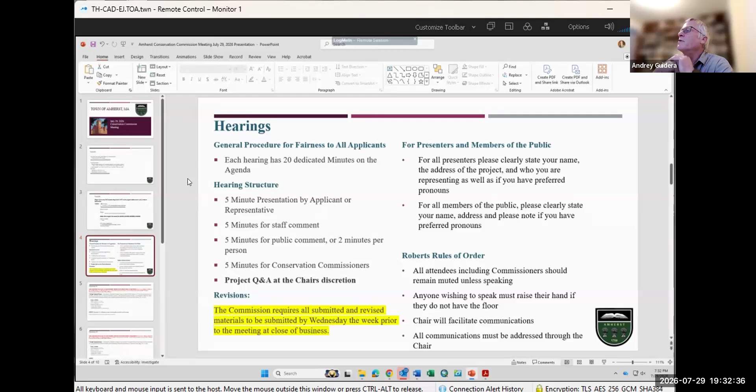This public hearing is now called to order. This hearing is being held as required by the provisions of Chapter 131, Section 40 of the General Laws of the Commonwealth, an act relative to the protection of wetlands, as most recently amended, and Article 3.31, Wetlands Protection under the Town of Amherst General Bylaws.

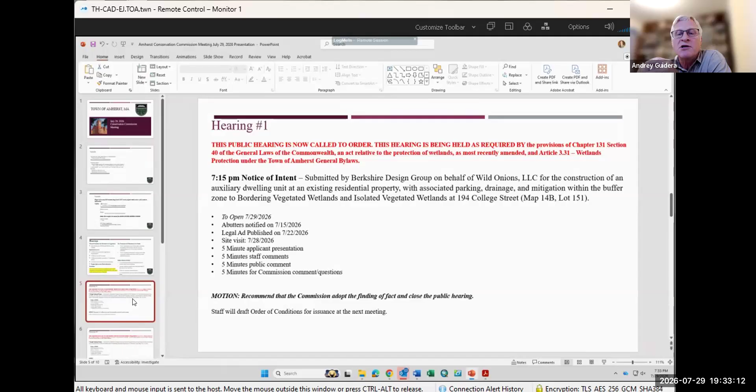This is a notice of intent submitted by Berkshire Design Group on behalf of Wild Onions LLC for the construction of an auxiliary dwelling unit at an existing residential property, with associated parking, drainage, and mitigation within the buffer zone to bordering vegetated wetlands and isolated vegetated wetlands at 194 College Street, map 14B, lot 151.

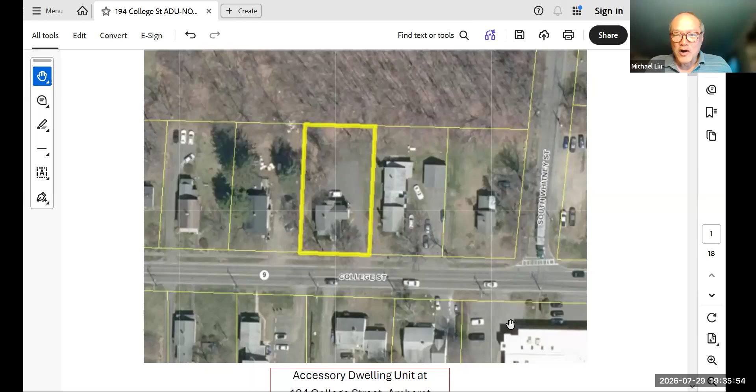This property, 194 College Street, is highlighted in yellow, that lot. The existing house you can see, and then there's a driveway that goes around on the east side, going north into a parking area. This survey shows the wetlands identified and delineated by Ward Smith of Wenda Wetland Services. In blue here, this is off-site. Along the north side there's an existing swale on the west side that's actually off the property, but there's an isolated wetland at the bottom of that swale shown in this blue line. The red lines indicate the 50-foot no-disturb zone, the 75-foot building setback, and this is the 100-foot buffer zone. So you can see that about 88% of the parcel is within buffer zone, and there's already development within 50 feet of the wetlands. The house is within the 75-foot building setback already, and there's further development out to the 100-foot buffer zone.

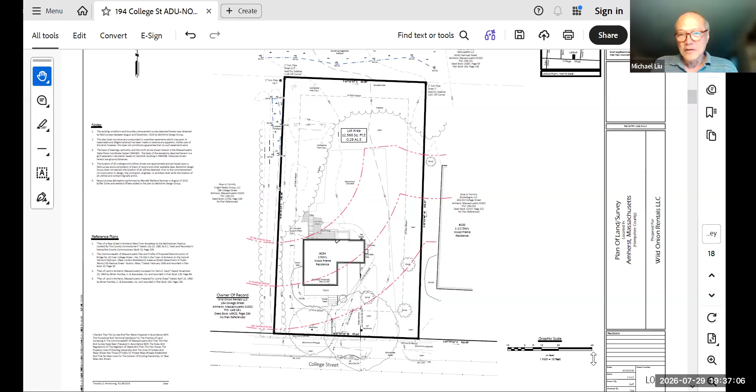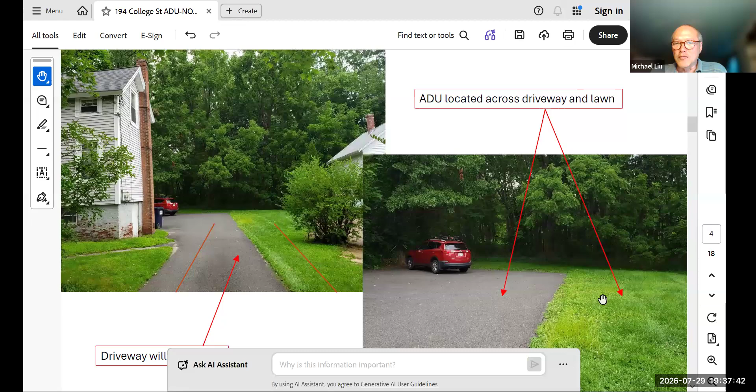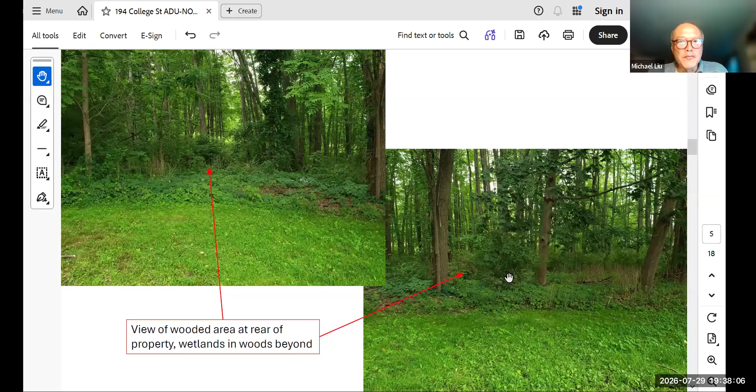I'm just going to go through some pictures real quick. This is a picture from the street with the driveway on the side. The ADU location is proposed to be where the arrow is pointing, in the back. In this photo from the driveway, the red lines indicate that the driveway is shifting over, and then it would go into the ADU, situated back here. The ADU would straddle where the existing pavement is and part of the lawn. In the back, in the woods, you can't see the wetland flags—our surveyors restaked them after I took these photos, but the wetland line to the north is within the woods. It's actually up gradient of the site by about a foot, so there's little chance of runoff migrating in that direction.

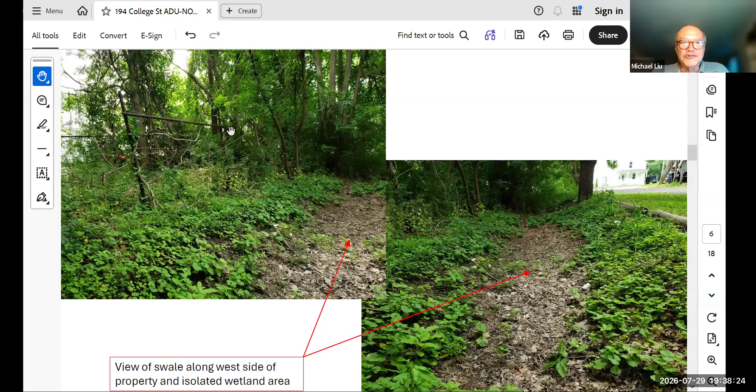These are photos in the swale and the isolated wetland area—I'm standing in the swale, looking back toward College Street. To the left here there's an old existing steel clothesline. There are actually two of these in the back of the site, which we're proposing to remove as part of the mitigation, and we'll talk about that. Ward can give a quick presentation on that mitigation after I finish.

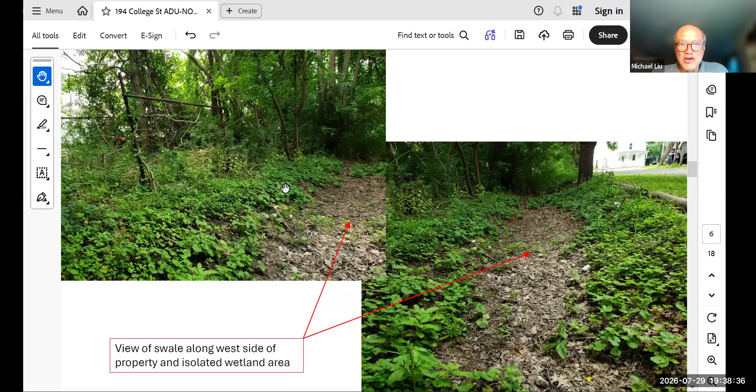In the back here, in this photo, I want to point out that in the rear of the existing building there are currently these bump outs. There's a first floor bump out off the kitchen, and a second floor den and entry emergency access bump out with covered stairs that go down against the house, and then open stairs that come down. The stairs are within the 50-foot no-disturb zone, as well as some of the paving underneath the stairs.

There's really no way we can fit this anywhere else on the site because of the side setbacks. Otherwise, the building would end up being in the front here, and there's just not enough room in this corner of the site to build anything substantial enough to be a residence, besides maybe one of those tiny houses.

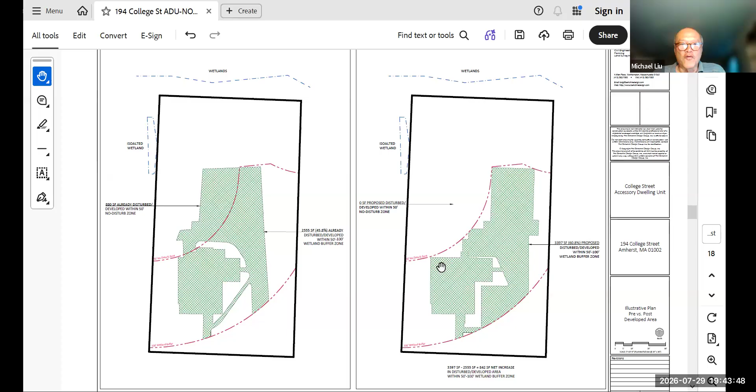Let me think, I'm not sure if we have... Oh, I'm just going to jump over to the planting plan real quick to show you the layout.

So this area of the native planting mitigation includes a number of shrubs. There's 5 species proposed, planted at 8 feet on center, along with a conservation seed mix here. It's listed with the species.

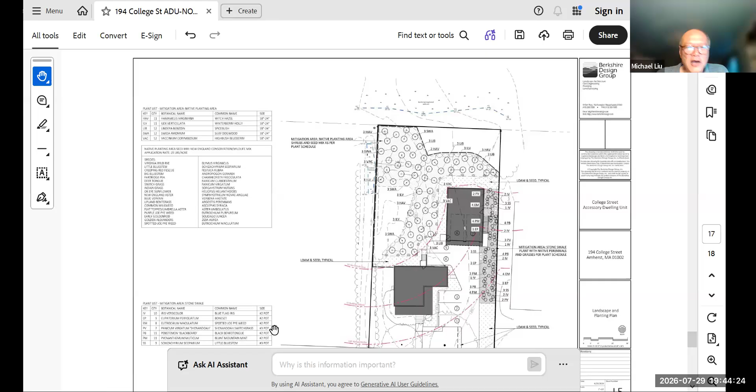And then within the drainage swale, we have, let me see, 1, 2, 3, 4, 5, 6, 7 — is it 7 or 8? 7 species of perennials, native perennials, and grasses to be planted within the stone swale.

I just like to chime in here just for a second. Sure, Mike.

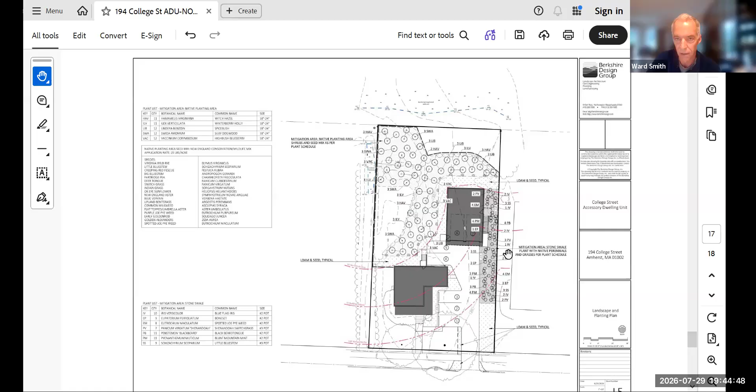So there are really 2 areas of mitigation. One is the pavement that's going to be removed. Topsoil will be added to that, and it will be sown with a native seed mixture and planted with native shrubs.

The farther area is currently wooded, and there's been a garlic mustard problem out there. Because of the shading of the trees, the Virginia creeper is actually doing really well against the garlic mustard, which I was happy to see. So our proposal is not to cut anything 3 inches or greater, to leave the existing canopy, even though some of those are non-natives, but to remove all of the non-native shrubs and bittersweet.

That would be removed by hand tools, clippers, saws, and hand shovels to dig up the root systems, and then planted with native species. A total of 58 shrubs are proposed to be planted in the mitigation area.

Great, thanks for clarifying. We saw there was a site visit yesterday. I think 2 of the commissioners came out, and we saw the bittersweet—some of the big vines were cut in the past, so you could see somebody had gone out there and tried to cut it, but it's obviously very hard to pull down out of the branches. We saw a lot of Norway maple saplings, multiflora rose, Morrow's honeysuckle, burning bush, and common buckthorn—those are the ones I noted for non-native invasive species. But all of that would be removed and replaced with native species.

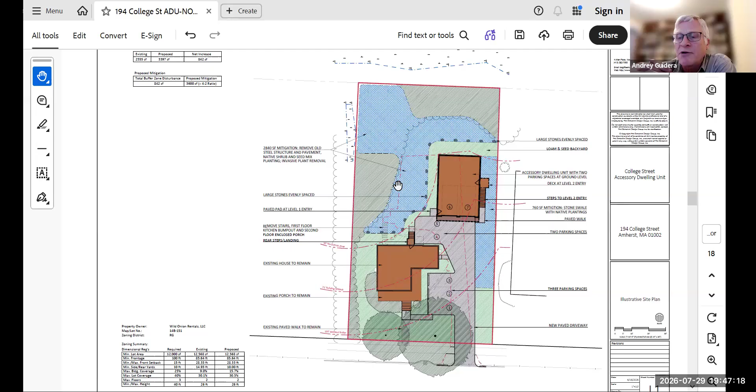Thank you, Mr. Liu. We're going to go now to Aaron Jacques for the town's perspective, and then we'll go to the public, and then the commissioners will have a chance to speak with you or ask you questions.

Aaron, do you want me to stop sharing? Yeah, that'd be great, Mike. Thank you. Okay, alright, Aaron, it's all yours for now.

Thanks. So I didn't have a chance to draft an order of conditions tonight. I started, but just unfortunately wasn't able to finish. But I wanted to share my thoughts on the waivers that were requested.

Just to refresh the commission's memory, back in 2024 this applicant came before the commission with an ADU proposal, and as a result of a lot of questions on the project, they ended up withdrawing. Since that time, we've met 3 or 4 times to basically review their progress. They wanted recommendations from me throughout, and have basically integrated every single one of my recommendations into this proposed plan. I'm really happy that on a redevelopment site we could incorporate this level of mitigation and natural restoration, while also achieving the applicant's goal of getting their ADU in here.

So, with regard to the waivers, one of the wetlands is an isolated wetland, and we do have a 50-foot no-disturb zone.

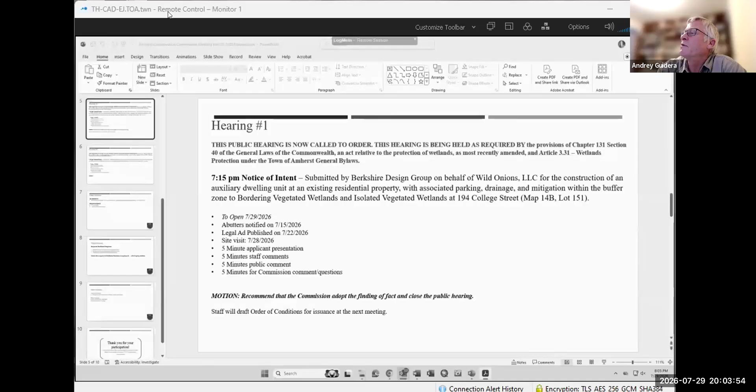All right, thank you. I don't see any more questions. So if we're satisfied that we'll have a decent order of conditions by next meeting, I would be looking for a motion that the commission adopt the finding of fact and close the public hearing.

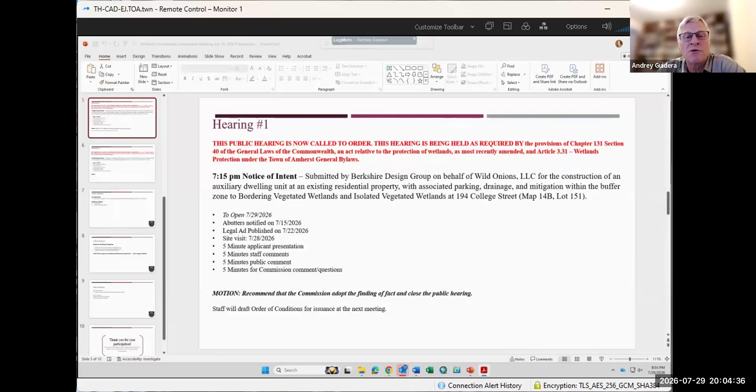I move to adopt the finding of fact and close the public hearing. Seconded, by Jason with a motion and Sarah with a second. Sarah, aye. Bruce, aye. Carol, aye. Jason, aye. And I'm an aye. So there we go, we'll get a finding of facts at the next meeting.

Thank you very much, Mike and Ward, thanks. Thank you very much, thanks for your presentation, have a good night. You too.

With that, we move to our second hearing that was scheduled for 7:20. This is a notice of intent. This public hearing is now called to order. This hearing is being held as required by the provisions of Chapter 131, Section 40 of the General Laws of the Commonwealth, an act relative to the protection of wetlands, as most recently amended, and Article 3.31, Wetlands Protection under the Town of Amherst General Bylaws. This is a notice of intent submitted by Berkshire Design Group on behalf of Amherst Montessori School for the renovation of a playground area within the buffer zone to bordering vegetated wetlands at 27 Pomeroy Lane, map 20C, lot 85.

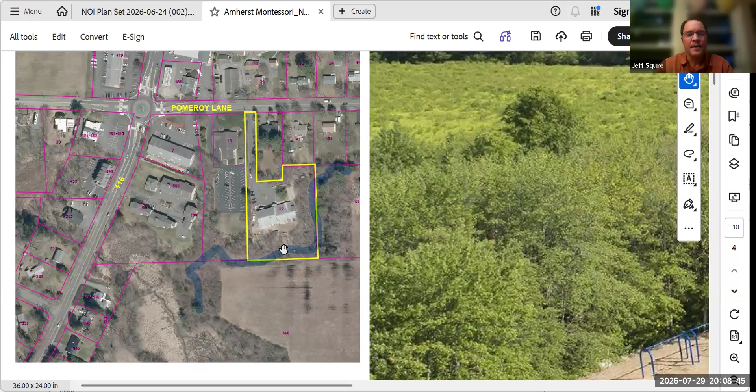I didn't have any great images, I'm sure Aaron has better ones from the site walk, but I thought these aerials I found were pretty representative of what's on the site. Looking south at the school, you can see the playground in the back, the swing sets. There are some culverts, tunnels, sandboxes, a number of different structures. Many of these are old pressure-treated tire type structures.

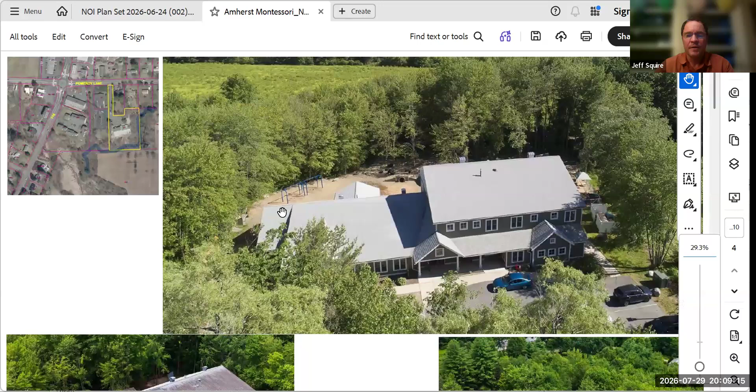So the goal of this project is really to renovate this playground into something that's a little bit more modern, a little bit more updated.

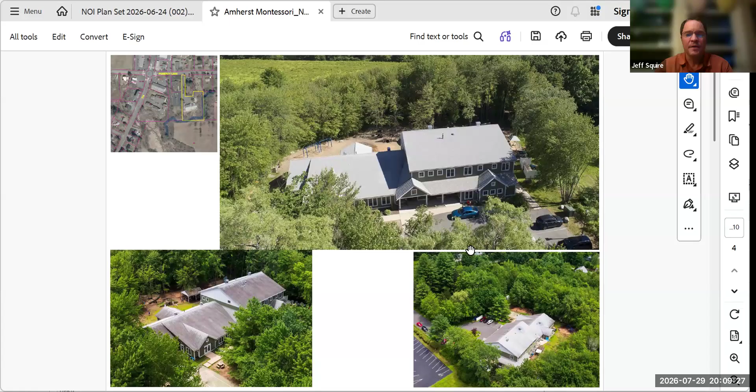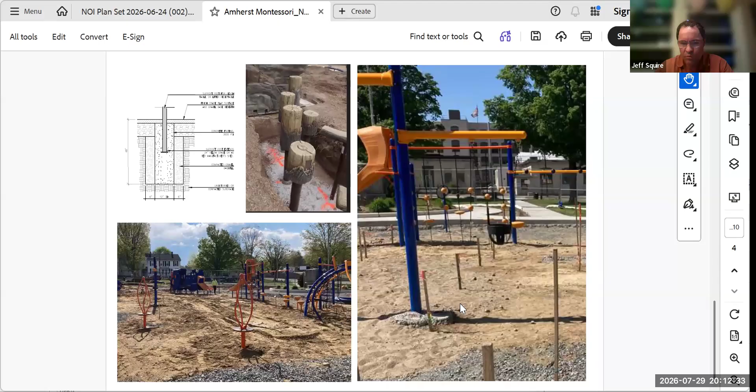I thought I'd just grab a couple of examples from other playground projects just to demonstrate the limited nature of the disturbance. It's really all about these concrete footings here. All of these products have footings with the exception of a few—this Cozy Dome, for instance, doesn't require the same amount of installation footing requirement—but net climbers will have one on either end.

So it's a fairly simplified construction process, very isolated. We did update plans to provide some erosion control around those individual installations when they happen. But this is going to be sort of a phased project moving around the site, as a school schedule, contractor availability, and weather allows. It should be relatively quick, the disturbance should be minimal, and like I said, it's really just upgrading an existing playground area that has existed on that site since the late 80s, I think.

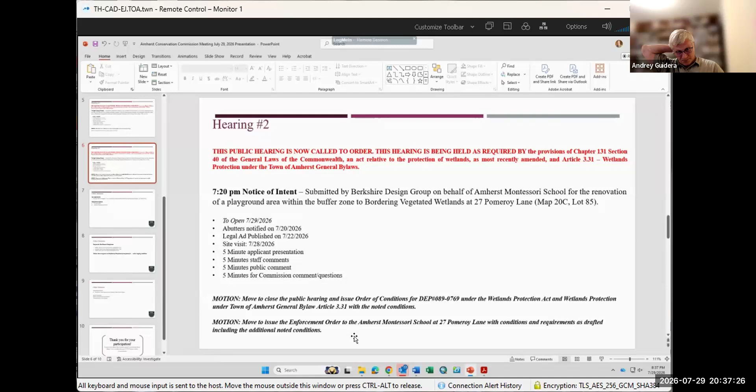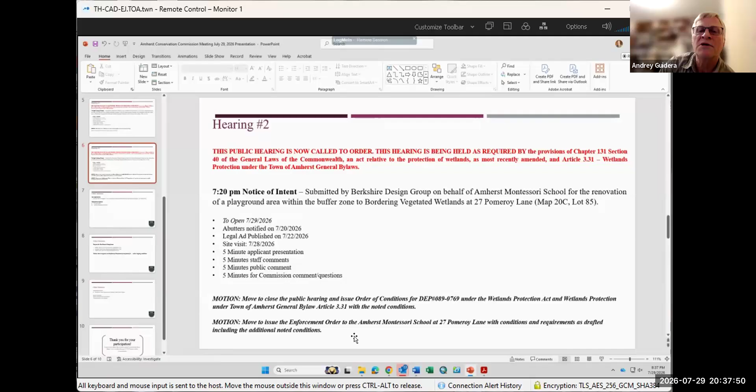I'll take the first one. I move to close the public hearing and issue an order of conditions for DEP number 089-0769 under the Wetlands Protection Act and Wetlands Protection under Town of Amherst General Bylaw Article 3.31 with the noted conditions. I second that. Bruce has the motion, and Jason seconded. Jason? Aye. Carol? Aye. Sarah? Aye. Bruce? Aye. And I'm an aye.

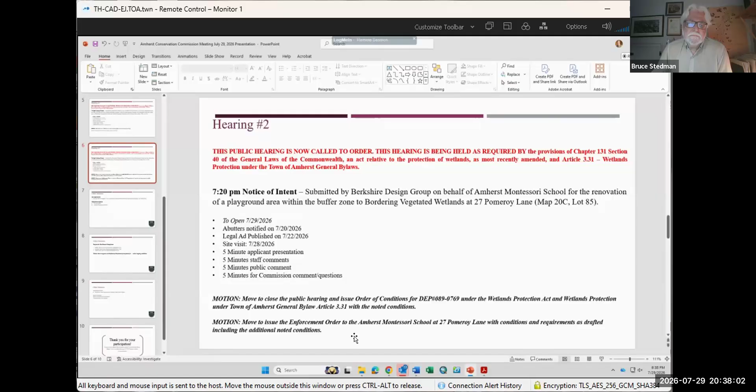That motion is approved. I move to issue the enforcement order to the Amherst Montessori School at 27 Pomeroy Lane with conditions and requirements as drafted, including the additional noted conditions. Seconded. Jason with a motion and Sarah seconds. Sarah, Aye. Carol, Aye. Bruce, Aye. Jason, Aye. And I'm an aye.

Mr. Squire, looks like we're set to move forward. I appreciate your presentation, and I wish you all luck in moving forward, and good luck getting the swale back into function. Thank you, I really appreciate the commission's time, and Aaron especially. This is glad we were able to resolve all this. Thank you, everyone. All right, thank you, have a good night.

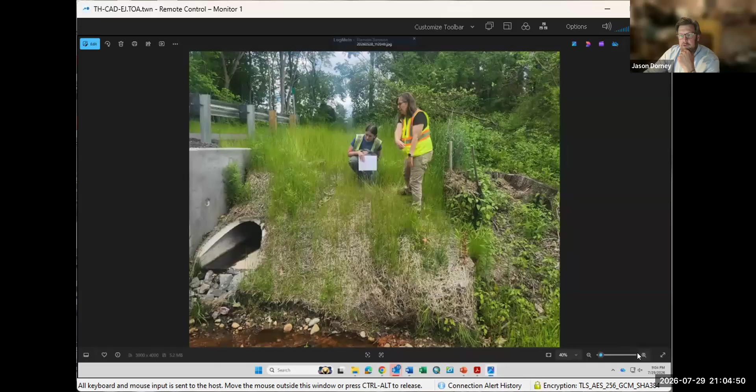But here, if you zoom in on the bottom part, you can see the polypropylene mesh—that green shiny plastic mesh. You can see where the straw goes in one direction and another, and they sandwich it between the mesh. As the straw biodegrades, the mesh is left there.

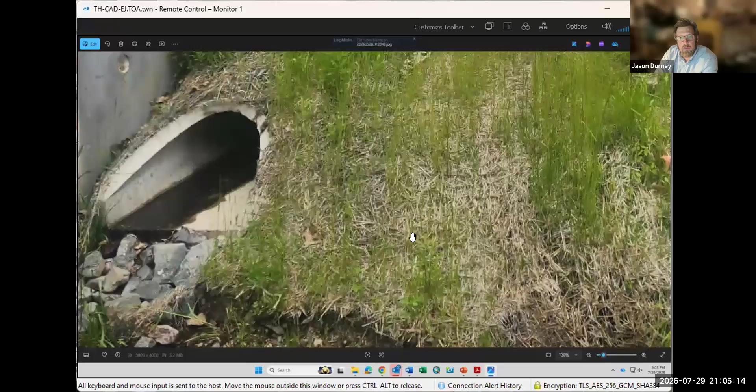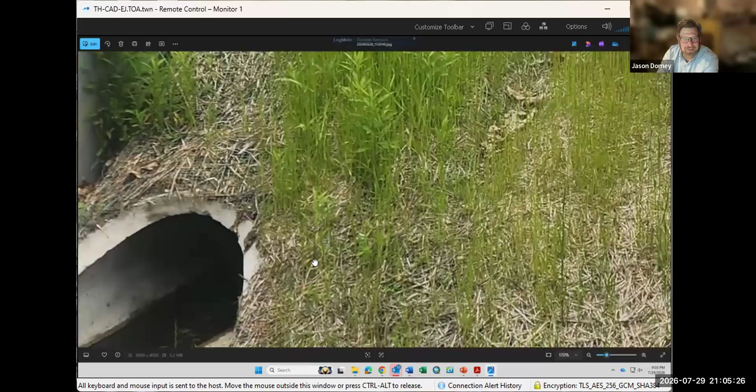Right above the culvert pipe there's a little section—I don't know, I've been doing this for 20 years too, so I can see this pretty clearly. I'll definitely follow up on that to get an answer, and also check the order of conditions to see if that was a specific condition. We'll address it one way or another at the next meeting—and we should celebrate the improved culvert. Just saying. Absolutely, without a doubt.